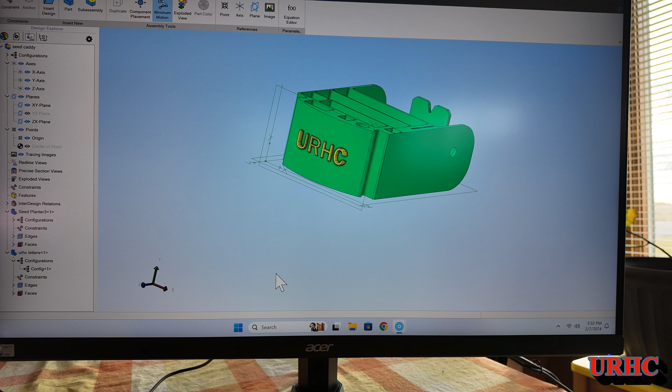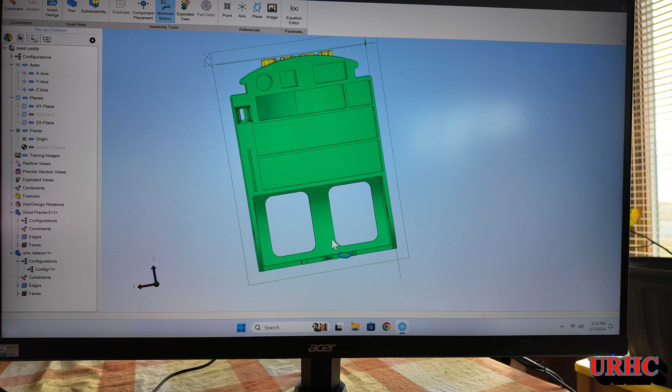So I went over to that Alibre Atom that I bought, and I've been enjoying this program, and made some changes to it. I added a roller string on the back, an area for a roller string, and then I went back and stretched it out a little wider for the spring, so I had some space to add a pair of the little clippers that I use for house plants inside and for transplanting. I also just put a spot for a ruler in there and made some other changes.

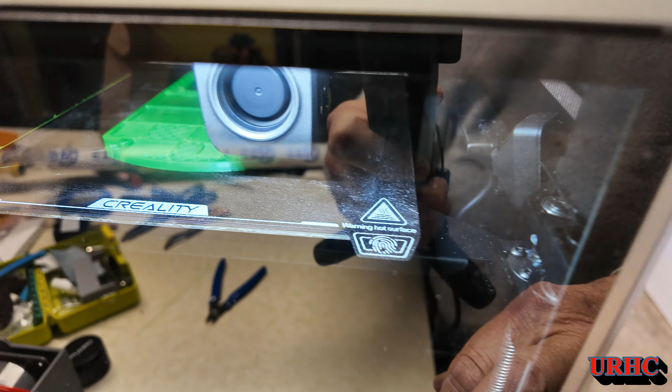So pretty much this is the final version I came up with, and I did have some problems when I printed it out. I used the dimensions on a couple websites and they didn't work right. But there it is. I also made some inserts because I don't have a two-color printer.

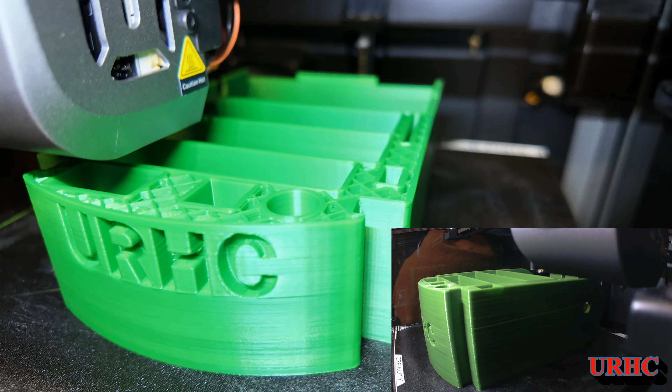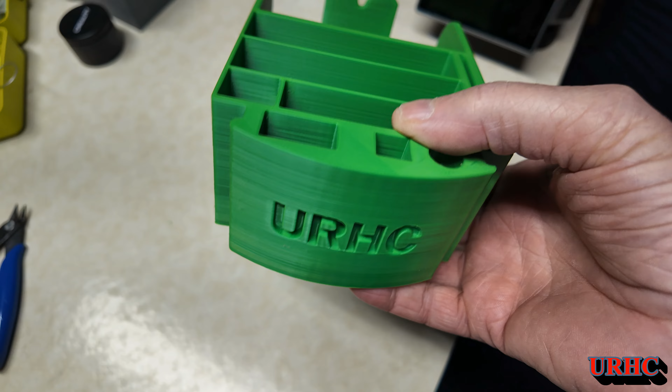But anyhow, down to the K1, and I did print out multiple versions of this. First one here I printed out as fast as the printer would run, pretty high speed, far from perfect, but it was just to see how things work. And this is where I found out that the string roll didn't fit in it anyway. But you can see a quick, easy print out after the first changes. And then you can see in that little box I also designed like a little watch spring type lock to hold the string in place.

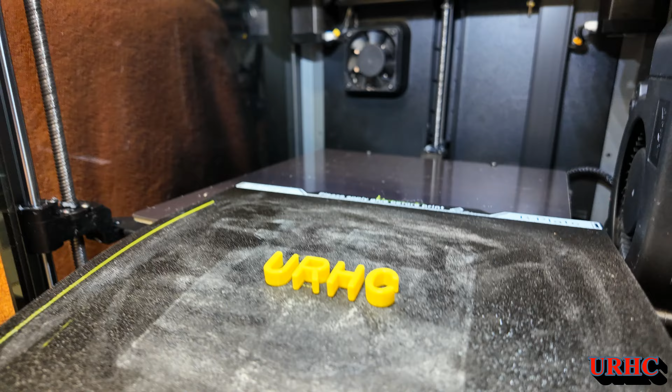But I'm really happy with this K1 printer. It's just amazing how much fun it is, especially compared to the lasers. I'm just having so much fun with it. You can make real things that you can use with this thing quickly.

Anyhow, let's go and put this together. Here you can see the little spring holders that I made to hold the string rolls in place. What I did is I 3D printed a couple ends, put some screws in it, cut a piece of fiberglass fence pole to fit in the middle of it. And there's the little spring-loaded thing, just like those little gizmos that hold your watch band on your watch. It popped right in the thing, and that all worked out good.

So it looks good, I think this is going to work out good. Yeah, I'm happy with the results here. First one, like I said, was too small for the roll, but I did eventually get it.

And I did have some problems with that you already see on the front, the R and the H - I didn't put supports in there, so the first row of 3D printing kind of sagged a little bit. So I just have to clean it out a little bit with a rotary tool to get the letters to fit in there flat. Then these are the pieces that hold the string.

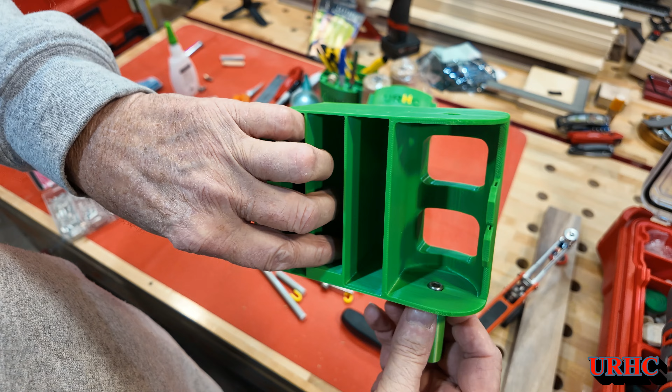And I printed them with a clearance hole for 1/4 tap. Actually, it's a little bit undersized, and let's see, I'm trying to tap this here and hold it, but it's just too hard. But I'll just put a little tap in there and show you anyway. You can see it does tap really nice. I was amazed how nice this 3D printed stuff taps. And there's a socket set screw, 1/4 by about 1/2, that I had laying out in the shop. I found a couple of them, and that fits perfectly in that hole that I 3D printed in there. So that's exactly how it's going to work.

And let's do it right. So I'll grab it with a pair of pliers here, just got a pair of smooth jaw pliers to grab it and hold it while I'm tapping. That makes it a little bit easier. And I was surprised, I got really beautiful clean taps in the plastic, and I was able to crank down pretty good on these screws to lock them in place. So I'm happy with that, now that I know that works.

That's a good way to mount things too. Alright, so there's how it goes together. And then I had this 30-year-old assortment of Harbor Freight springs I use all the time. I grab springs when I need them, and found a couple that looked about the right size for what I need. They fit right in the hole there, and they're like a Chinese handcuff slipped together there.

But eventually I got them apart and dropped one on one side in the piece of fiberglass pole. And these, I got at Tractor Supply, they're just the electric fence poles that you push in the ground.

And then I'm going to just glue in another set of these little characters here, using super glue on them. It would be nice to have a multicolor printer, but I just can't justify the cost. It's so easy to do stuff like this rather than waste all that extra printer poop getting color prints and stuff.

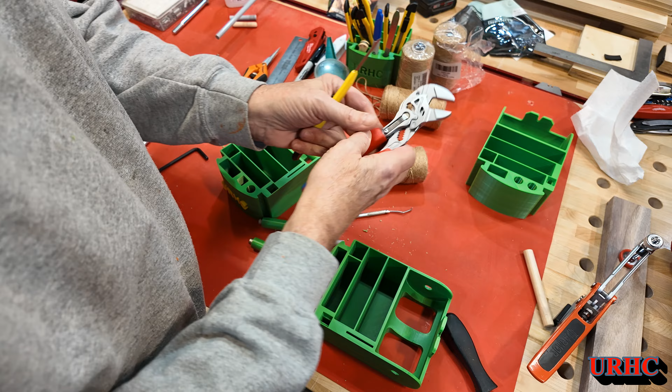So another thing I did, for cutting the string in the back, I put a knife blade in. Now these little 9mm knives, it was cheaper to buy a batch of knives than to buy a set of blades on Amazon. So I just bought like 8 knives, and I'm going to break off a piece of the blade, just long and a little bit shorter than what I need in there.

And I did 3D print a pocket in there, and they slide in there, and the friction seems to hold them in place pretty good. You got to be careful you don't get stabbed pushing it in. The tap, and there's my cutter. You can't get your fingers down in there to get cut, but it does work on the string. So that was the simple solution to have a way to cut the string without digging out a knife every time.

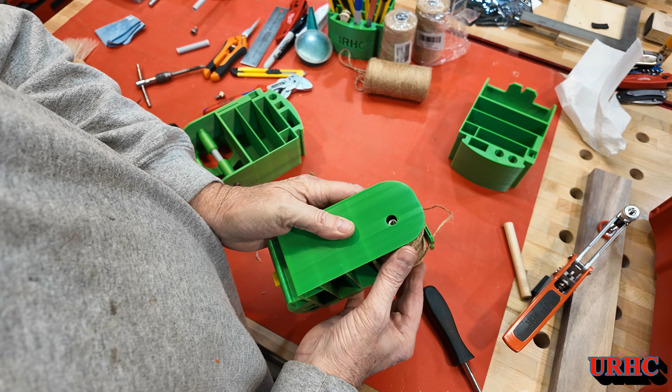And I decided to try this jute twine this year, because all that cotton takes like 5-6 years to rot in the compost pile. So I figure this stuff will rot pretty quick. You just slide them in there and push them in with your finger and then pop it in place. That really did work good for holding the roll in. I mean, that's a good idea for anything you want to build or make, to work. So I have some twine out there when you're putting the little transplants out, trying to tie them up and stuff. Makes it a little bit easier on me too.

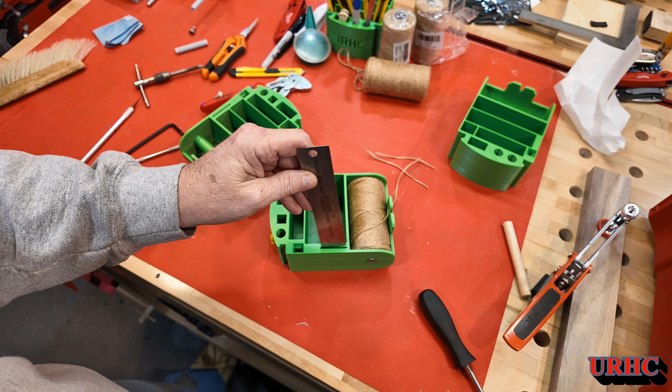And then I had a little stainless steel ruler I printed a pocket for. I don't know, I got them at my dollar store.

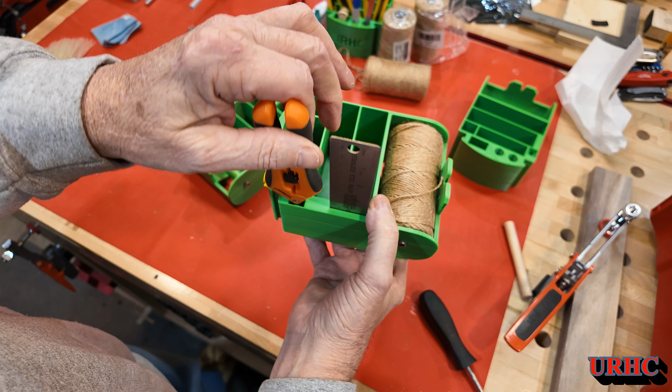And these little pruners that I use in the house, I use them out in the garden and stuff too. So I figured I'd throw a pair in there. They're cheap on Amazon, if you buy 6 of them, they're like $2 a pair. If you go to buy one, it's like $5. But I have a couple pairs of them laying around, so I usually grab one.

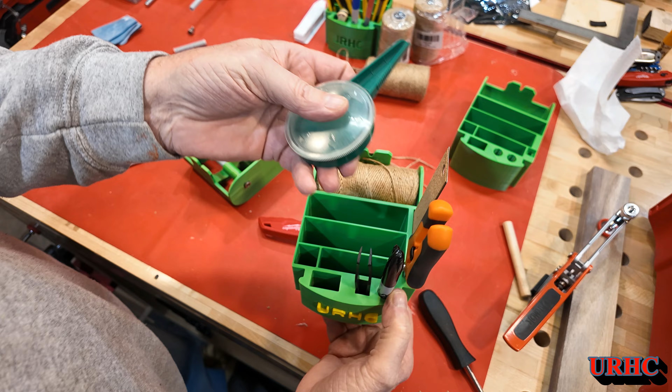And then I took this Sharpie holder, the middle one, I made that square so I could do either a Sharpie in it or my little tweezers, because sometimes I use them to put seeds in too. And then this is that little seed feeder. This is the good one, and then I've got the other ones from Amazon that also fit.

I always like to have some little markers, so I mark things when I'm putting them in and know exactly what it is if they're not marked. And this is the knife I decided on, a Milwaukee stainless steel folding blade knife. Figured that would be good for the garden.

Boy, it's heck to try to find somebody that'll ship a knife to you in New York. Amazon won't ship them, so I had to go through Home Depot. And the numbers they had on their website were wrong, so that first one was wrong, and you can see I got it so it fits in the second one. So that's the reason for that last print.

So I have 2 of these caddies that are good. And then I put a little piece of rubber on the back there, self-adhesive rubber with a slit in it, just to hold that end of the rope when you snap it off. You snap off the piece, you don't want it to go flying and unrolling.

So let's put that rubber in this one now. And you can see with a roll of string on there, it's kind of a pain in the neck to get that out of there. You got to push up from the bottom while you're pushing in on those things. But when the roll is empty, there's no core in this roll, so it'll pop right out.

And there it is, a little piece of self-adhesive rubber that I cut and just put a slit in it for the actual string to get caught in. So I just stuck that in there, and it worked good. I was pretty surprised, it's a soft neoprene type rubber. It worked good. Let's snap that back in there.

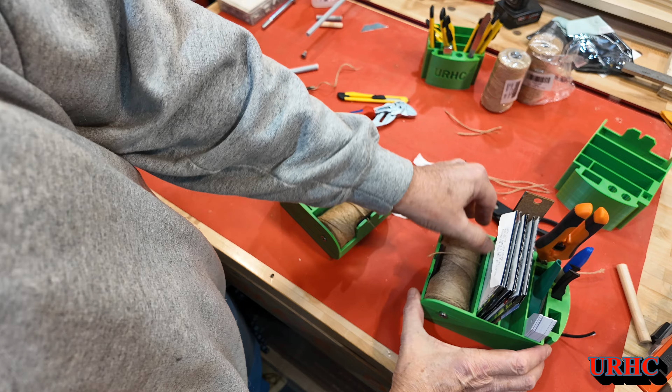I'm really happy with the way these came out. It's going to be such a handy little thing for the garden, because I'm always forgetting stuff or having it laying around. So it's so nice to be able to grab everything at once. And again, having a roll of string will be good, because whenever I'm putting the transplants out, I usually have to put a little stick in and tie them to it.

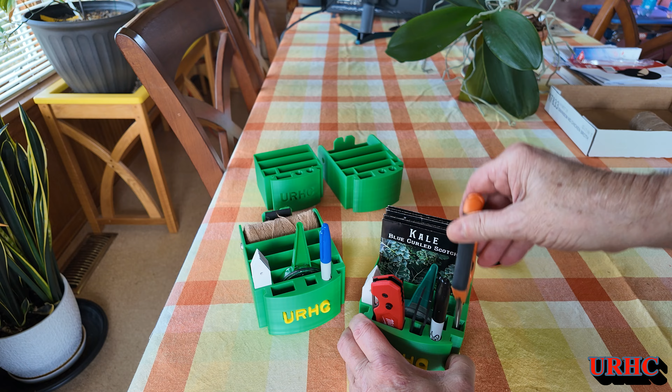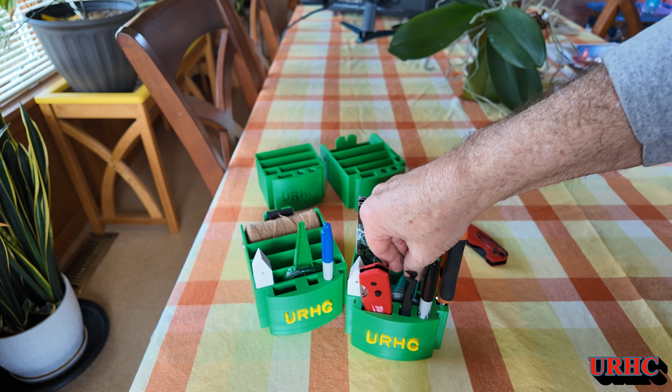So there it is, the final version, and again they contain everything that I'm going to be using out there. I think I got it, came out really nice, I'm happy with it. A 3D printer is just so much fun. I mean, you can make wall hangers and stuff like that with lasers and other things, but 3D printing just opens up a whole new world. So I've been happy with that Creality K1.

I went with this knife, but I did find out that the other standard Milwaukee folding knife will fit in here too, the one with the steel blade and steel thing. So this one would rust, but it would work too. Either one fits in there, and I do have plenty of room for seeds, which is what I grabbed to go out there.

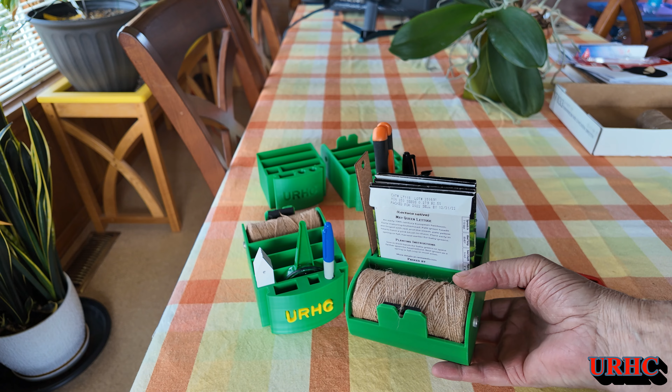I just thought I'd share this, something to play with while I'm waiting for my seed orders to get here, and to get ready to fire up the grow tent soon to get all the garden plants started.